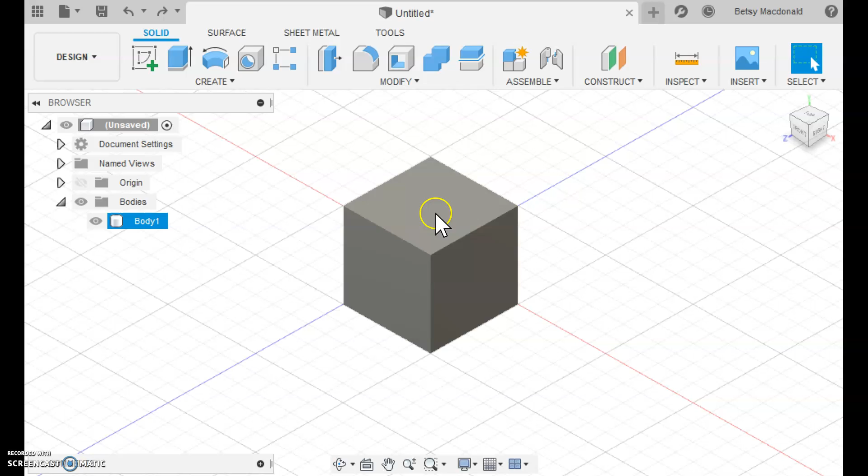We're working with primitives and I'm currently showing you simple ways to combine primitive bodies. In a previous video, I showed you how you can combine bodies by creating a body on the face of another body, like this. So I already have a cube here waiting, and I'm actually going to rename it cube to point something out.

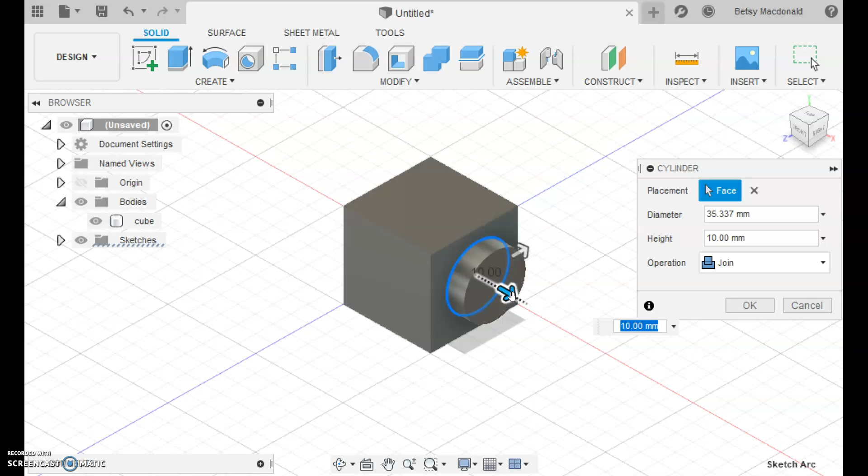If I decide I want to create a cylinder here, and I click the face of the cube as the place I want to create it, once I click OK, I don't see a new body appear here, which is normally what happens when you create a new body. If I were to create a new body over here, when I click OK, I see that new body.

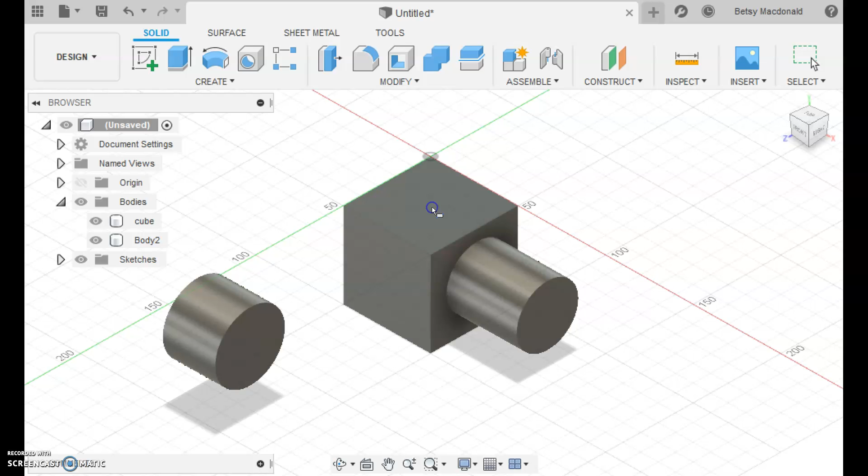But because I created this cylinder directly onto the cube, and I did that because after you choose a shape, it has you click the face or the plane of where you want to work. If I click the face of a rectangle, then I will be creating a primitive which is automatically joined to the body I had selected originally. So that's a really handy technique to know.

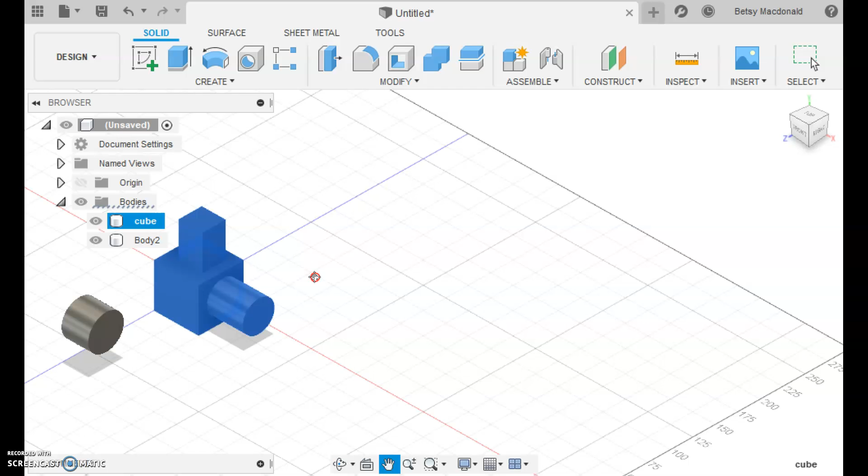It doesn't work as well with primitive shapes that do not have a flat face. It technically will work, but it's harder to control.

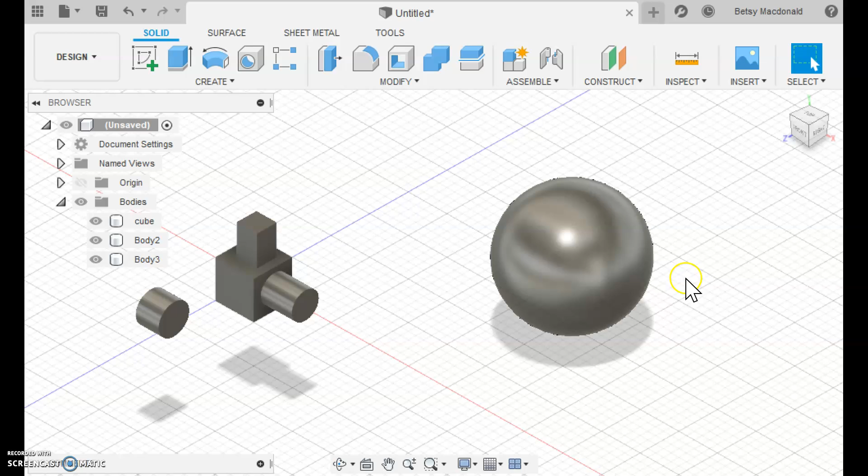So if you want to have two shapes combined, like let's say I want to put a ring on here, like an open mouth, then what I recommend is that you create the shape separately. And so I can make that a mouth onto here. And I'll have to hit enter.

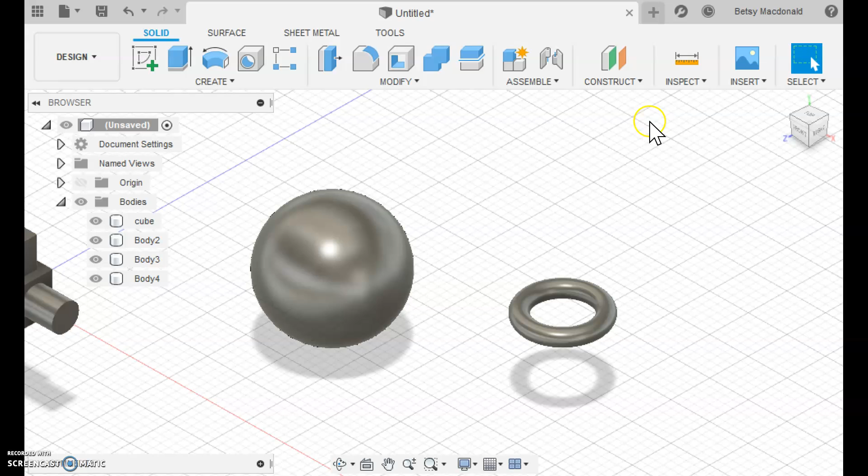So I'm back to having two bodies. So this is my sphere. And this is my ring, or torus is the real word.

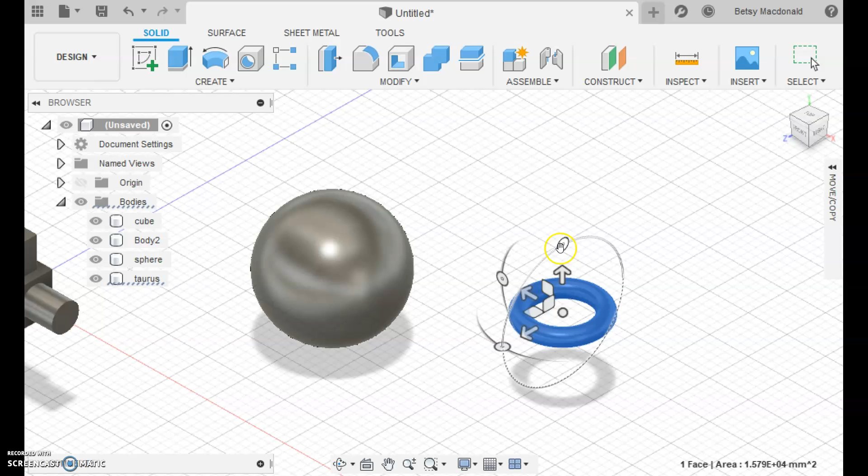Okay, I'm gonna rotate that because I didn't draw it on the right plane. So I'm gonna right click, move copy. I'm gonna rotate this in this direction. I really want to go -90. I'm gonna look from this angle. I'm gonna pull it forward over here. Now I'm gonna look from this angle and pull it over here.

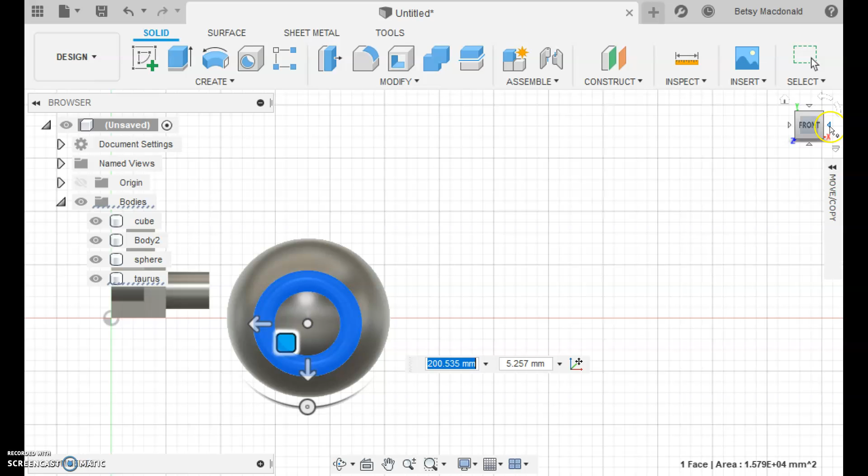Almost looks like Kenny from South Park. Okay, so if you want to draw Kenny, this could be a good way.

So I have it a little bit embedded onto there. But you can see they're placed nicely. There's still two separate primitives, two separate bodies, which could be okay.

It just depends. But the purpose of this is to show you how to join bodies together using the combine menu. So once you have your primitives in shape of how they are in relationship to each other, you can then use the combine command.

I prefer using the combine command without having anything selected. So I'm not going to click anything. I'm going to go directly to modify and then combine. And then this should pop up open already. I had collapsed mine, that's why it didn't come open.

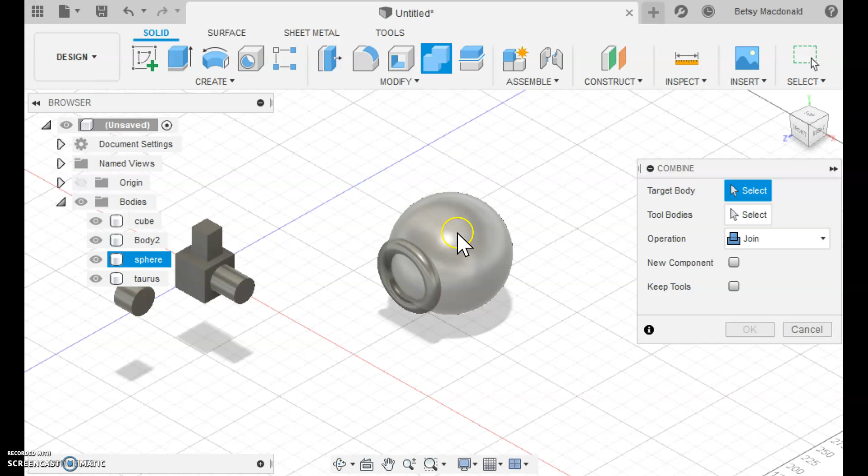The target body is basically the main part of the body. So in this case, it's my sphere. And then it automatically switches to the select button for tool bodies, which is basically sort of the secondary piece that you want to add in this case. So now I'm going to click that torus.

And then this shows us the operation, and we want to be joining. And again, I want you to focus on these bodies listed over in the browser, because once I click OK, we lose a body, technically lose a body, and now it's all combined into one body.

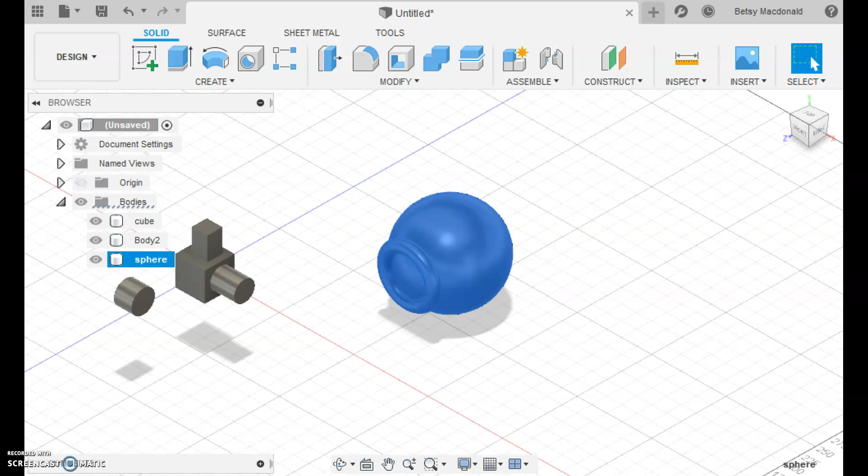So combining is used, or needing primitives to be added together, is a common need in Fusion, and those are the two easiest ways I find to do it.

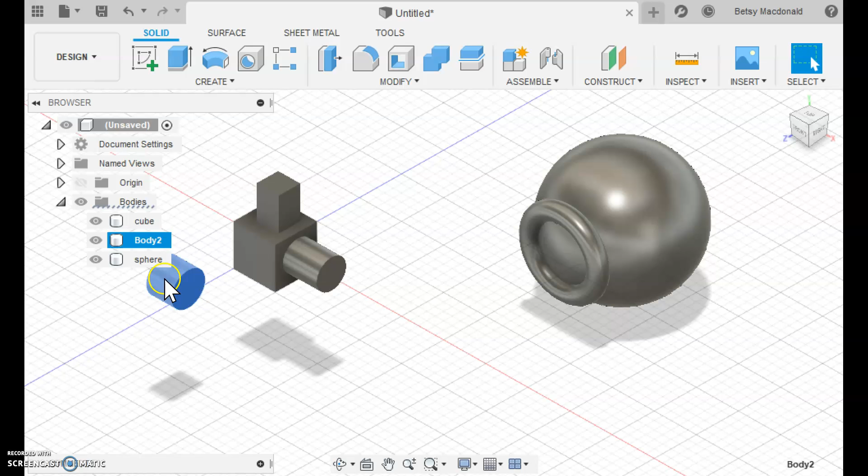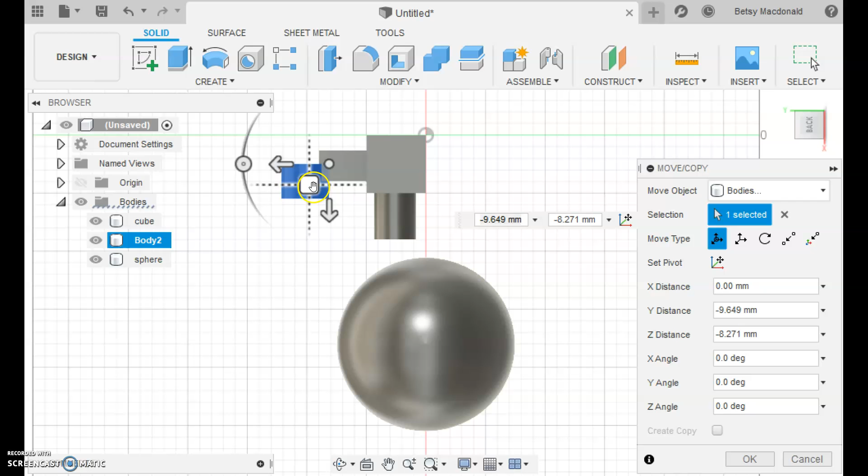So again, the combine menu, what I tend to do is I will first position the item that I want to combine. So let's say I needed this combined on top of here. And like I tell my students, it's a good idea when you're positioning stuff to look at it using this navigation box that helps see whether it's positioned the way you think it is by looking at the various perspectives.

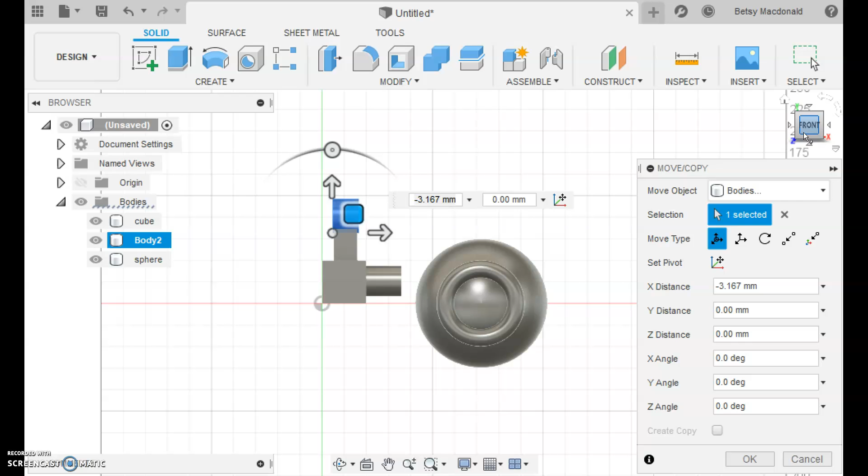So that's not snapping right. In fact, if it's not snapping right, a lot of times the square is the better move tool. So I'm going to go back to the home view, have another look at front, have another look at right. I'm just going to keep spinning that cube to look at it from each angle. I'm going to shift it a little bit this way. Okay, so if I want that, I'm going to enter to keep that location.

If I want the cube and the body 2 to be combined as one, the method was, and again, I prefer to have it deselected. I'm going to go to Modify Combine. Your target body is the main body. Your tool body is the one you want to add to it. And keep that on join. And when you click OK, you will see that those two bodies get merged into one.

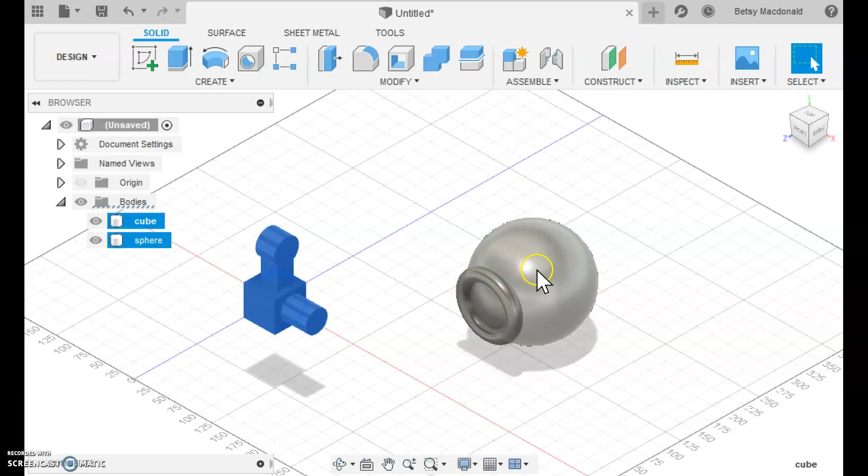So I hope that's helpful for you. You can see they still can be selected separately. But if you click in the browser, it'll select the whole combined body. So I hope that's helpful.